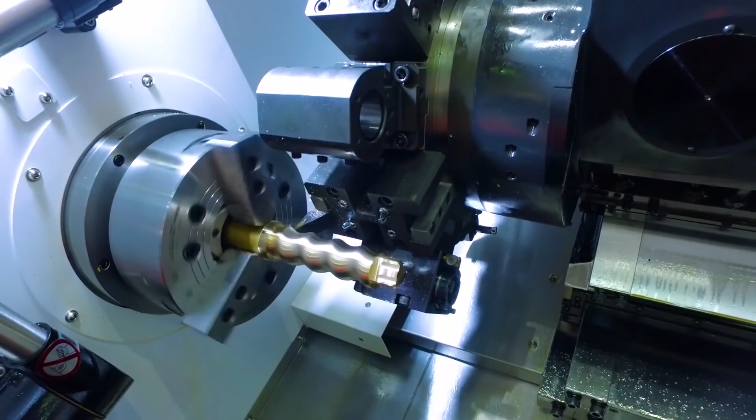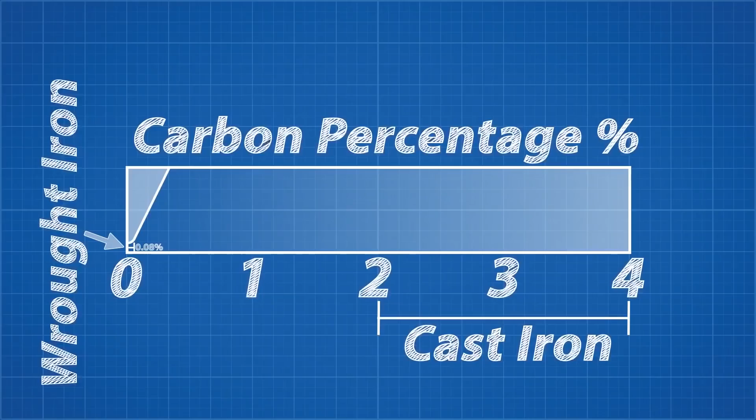We have spoken before about how the refining process of iron determines whether the resulting material will be iron or steel, and how the exact percentage of carbon present has dramatic results on the final material properties, and how production methods through time have taken steel from an expensive material reserved for swords, armour and toolmaking to one that is permeated into nearly every technology we use in our lives.

But I failed to tell you why that simple addition of carbon has such a huge effect on the iron, turning it from a relatively weak material to one capable of launching an industrial revolution, which is what we're going to learn today. Much of our knowledge in crafting steel was passed down over the centuries from blacksmith to blacksmith, creating tools for their communities.

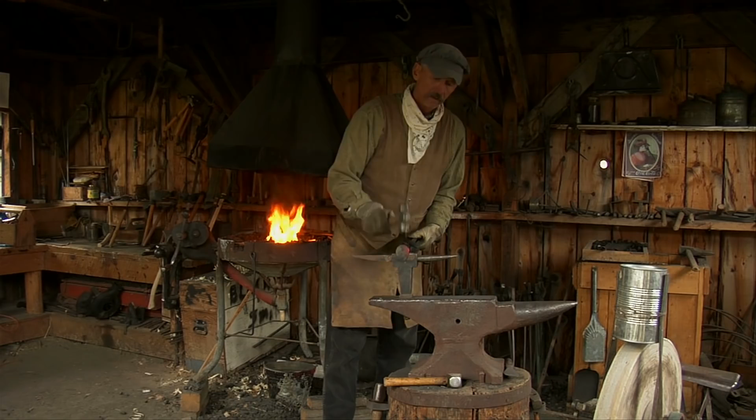So to learn more about this amazing material and how blacksmiths carefully tailor its material properties, I visited Alex Steele's workshop to create my own knife from scratch.

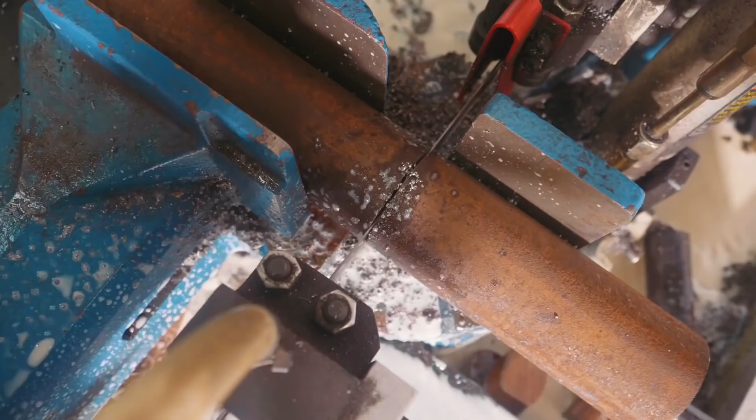We started our forging process with round stock 1055 steel with 0.55% carbon content, and placed it in the forge and gradually shaped it with a power hammer to a rectangular bar that could be more precisely shaped into the shape of our blade using a 3-pound hammer that my wee arms struggled to swing after an hour.

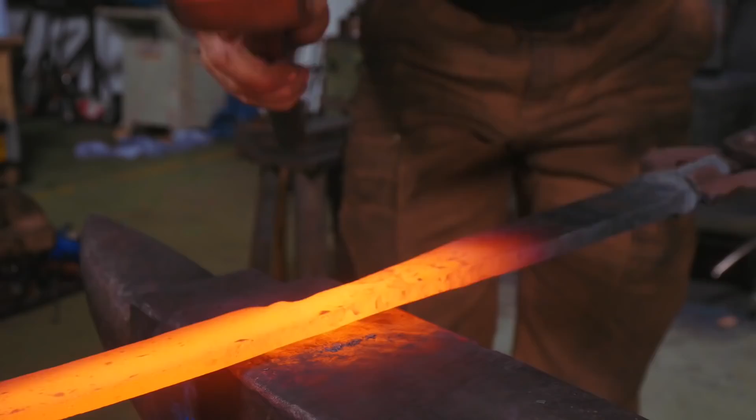Once we roughed out the shape, we began to grind and refine our blade, eventually producing our blade blank that would be later grinded to its final shape. But before that could happen, we needed to perform some metallurgy wizardry through the heat treatment process.

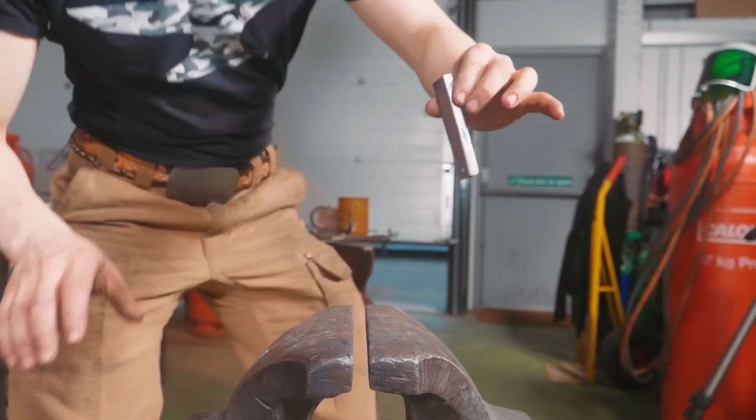To drive home how important this step is, we tested 4 samples of the same material at different stages of the heat treatment process. This was our sample before the heat treatment process, which you will quickly see was the weakest of the bunch. This is the normalized sample, which was ductile with a low yield stress. It took several hammer blows, which it absorbed through plastic deformation, not ideal characteristics for a sword or knife.

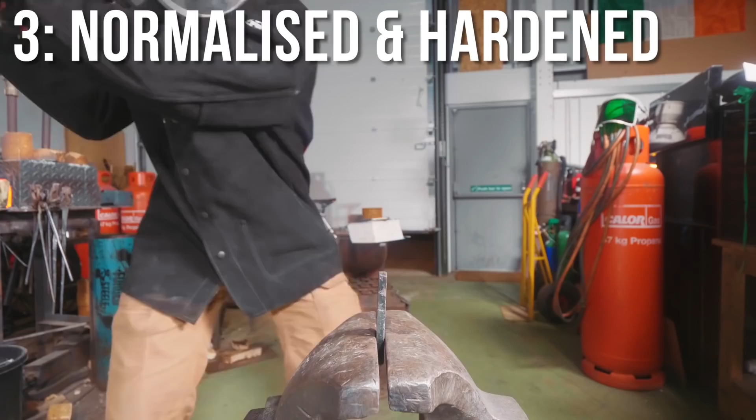Next we tested our quench hardened sample, which is stupid and dangerous and should not be tried at home. This fractured explosively and tore a hole through Alex's reflector.

Finally we tested the tempered material, which absorbed every hammer blow with minimal plastic deformation and only broke when we cut a notch into the material to create a stress concentration point. This material is tough, capable of absorbing energy without deforming permanently, and hard, allowing it to resist damage to the cutting edge. It is the ideal material for a blade.

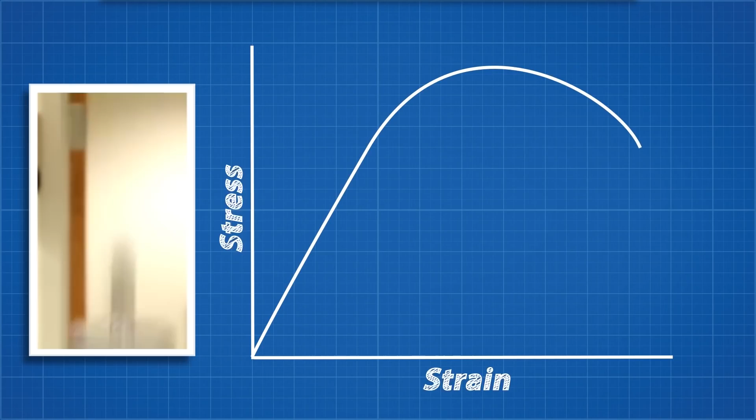So how can the same steel alloy change so radically by simply applying heat? Well, this is the magic of the iron-carbon alloy. We can carefully control how the internal metallic crystal structure forms with heating and cooling cycles.

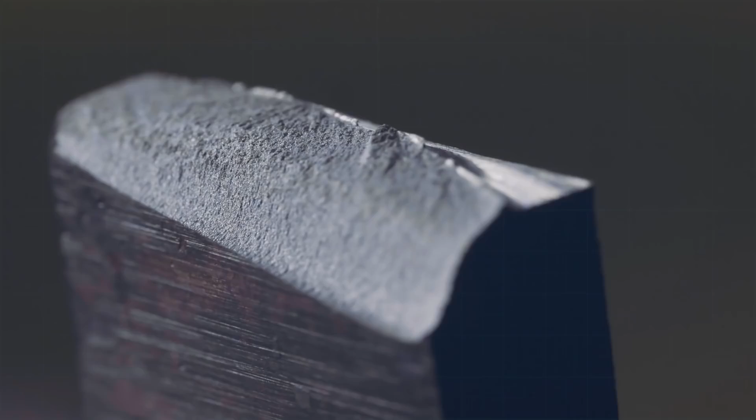First, let's see how adding carbon to the iron affects the crystalline structure. With no carbon present, pure iron forms a crystal structure called body-centered cubic with an iron atom at each of the 8 corners and another in the center.

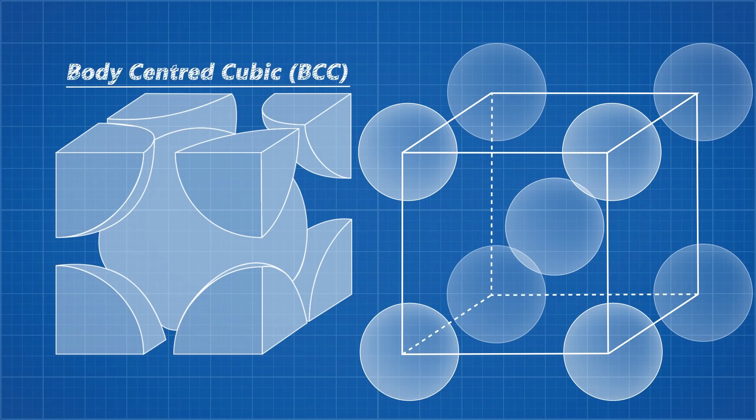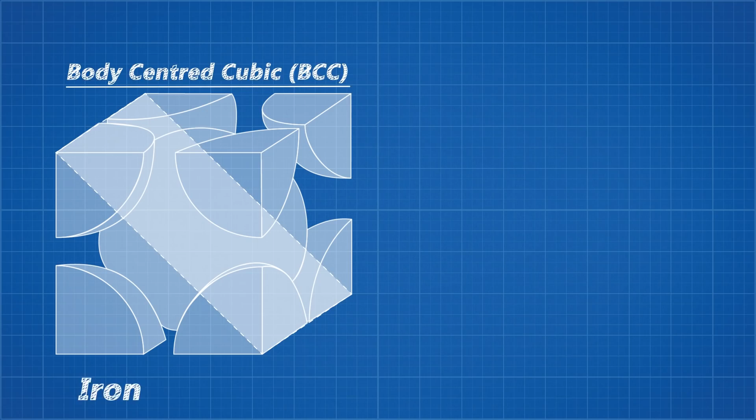Each crystal structure has a direction it most easily wants to deform, called a slip plane. For body-centered cubic, the slip plane occurs along this plane. Metals with body-centered cubic crystals like iron and tungsten tend to be harder and less malleable than metals with face-centered cubic crystals like aluminium, lead and gold.

When a metal is cooling, these crystals grow from individual nucleation points and form grains where each grain has the same orientation of slip plane, but neighbouring grains may not have the same slip plane. Let's think about this 2-dimensionally.

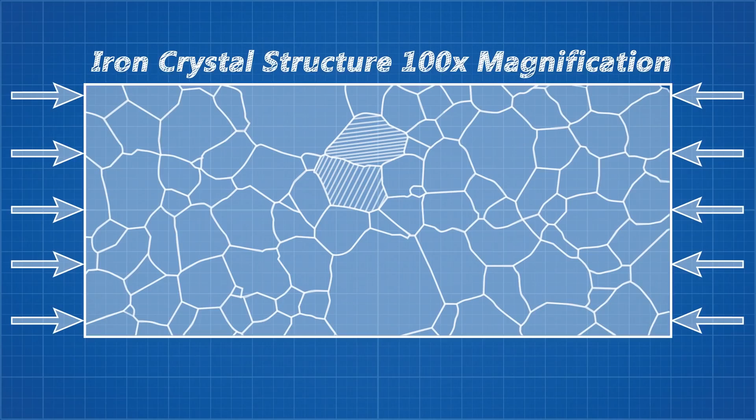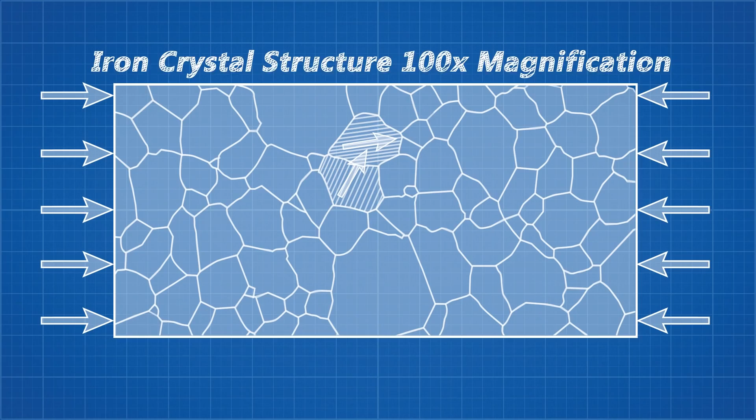When a force is applied, the grain wants to slip in a particular direction and passes the force onto the next grain in that direction too. But this grain's slip plane is at a different angle, so that force needs to be greater in order to cause deformation. It's like trying to push a train down a railway track by pushing on its side - it's not going to go anywhere easily. So smaller and more numerous grains results in a stronger material.

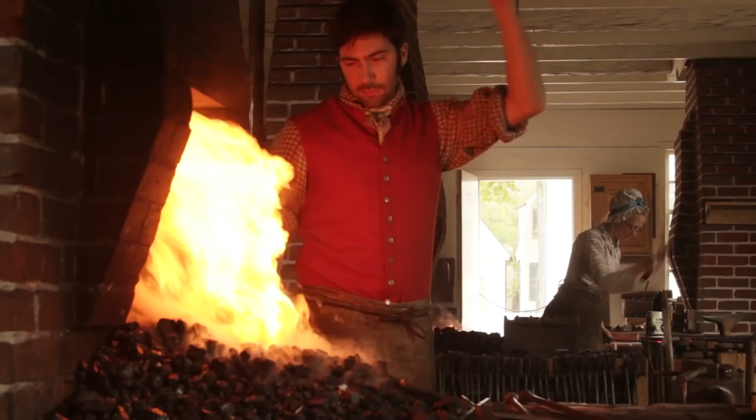Pure iron tends to always have the same crystal structure as it cools, and its crystal structure doesn't change meaningfully with heat treatment. This is where alloying with carbon comes in.

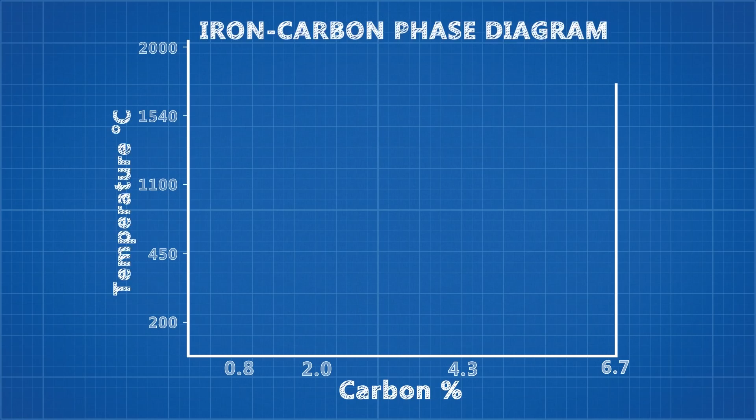To explore this, let's look at our phase diagram for carbon steel. On this diagram, we have our carbon content percentage on the x-axis and the temperature of the metal on the y-axis. This tells us the crystalline structure of the metal at various temperatures and carbon contents. On the left-hand side, we have pure iron, which forms only one crystal structure called ferrite. As we move across the diagram to the right-hand side, less and less of the crystal structure forms ferrite, and more forms an iron carbide alloy, commonly called cementite.

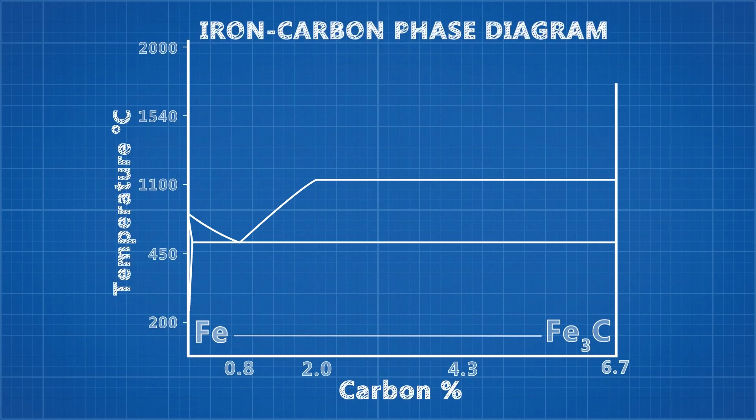Now if we move up in temperature, we start to see these lines that represent transitional temperatures, where the crystal structures of the steel begin to transform into a new crystal structure called austenite. Moving further up again, we see these lines representing the transition of the material to a liquid state.

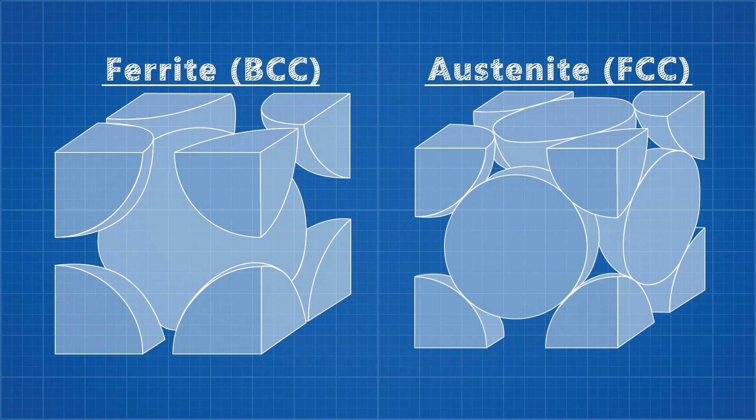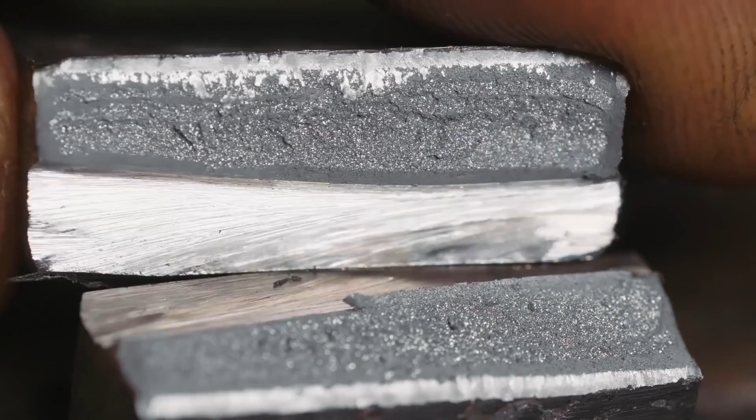Austenite's primary difference to ferrite is that it forms that face-centered cubic crystal structure that we saw earlier, while ferrite is body-centered cubic. And while this packing pattern is denser than body-centered cubic, it does open up spaces in the crystal structure that interstitial carbon atoms, which are smaller than iron, can snugly fit, allowing austenite to have a higher solubility to carbon over ferrite.

Using all this information, let's take our 1055 steel with 0.55% carbon content and see how it transforms from the start of our heat treatment cycle to the end.

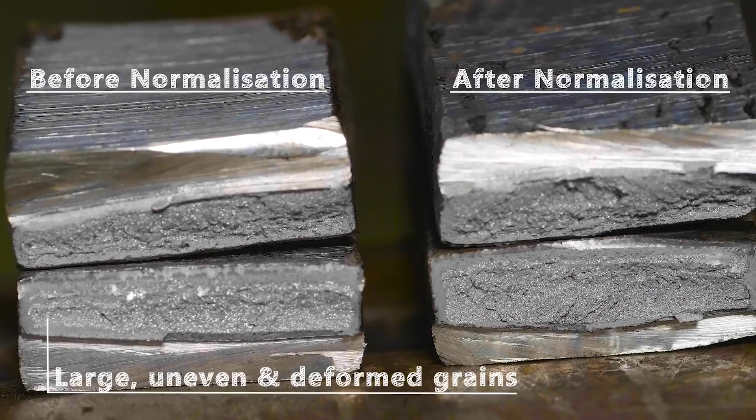The first step is called normalization. Normalization's primary function is to relieve internal stresses and strains that form during the forging process and return the material to its original crystal structure before forging began. It's effectively a reset button for the steel and creates a nice even grain size and distribution, increasing its strength.

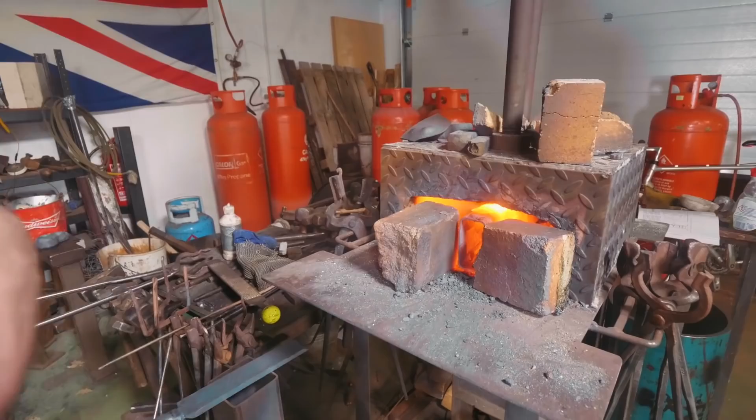Here we place the knife inside a steel tube to prevent the metal from receiving heat directly from the flame, but instead a more even radiative heat from the tube. Once it reaches this transition temperature, we let it soak to give the crystal structure time to settle. The next step in normalization is to allow the steel to slowly air cool.

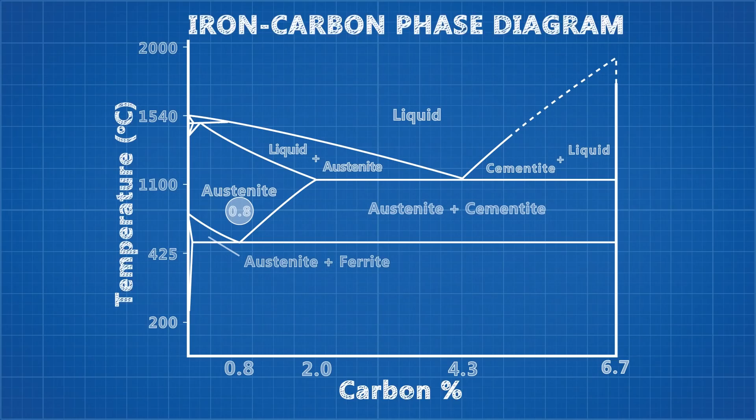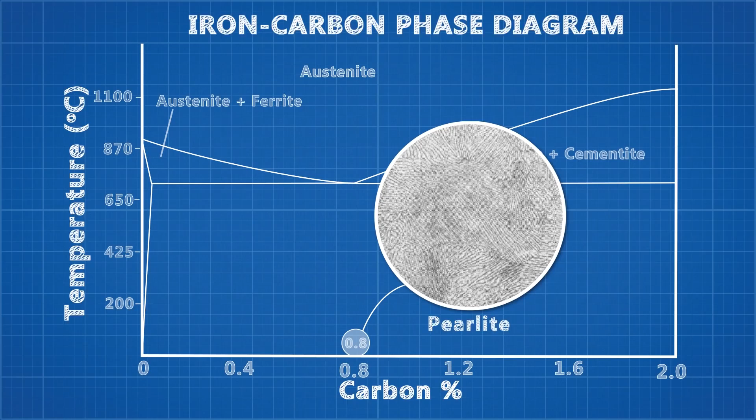What happens now depends on the carbon content. If we take a 0.8% carbon steel - no, hang on, we're definitely going to need a bigger graph for this. Okay, if we take a 0.8% carbon steel and cool it through the transitional temperature, the austenite and the interstitial carbon will slowly transform to a mixture of ferrite and cementite, which takes this lamellar structure called pearlite. Pearlite only forms at a 0.8% carbon solution.

Now if we take a 0.2% steel and slowly cool it to its first transitional temperature here, where ferrite first begins to form - ferrite is pure iron, so as it forms the carbon percentage begins to rise. This will continue to happen until the remaining austenite has a carbon percentage of 0.8% and will then form pearlite from this point on. This forms a crystal structure dominated by ferrite, showing here as a lighter colour, surrounded by the darker pearlite.

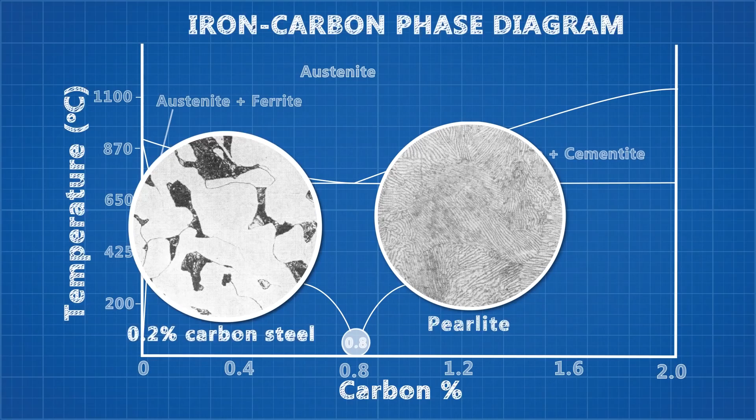Comparing these microstructures to another two, we can see the effect carbon has on the microstructure. Here we have pure iron with 100% ferrite, showing us the light colour. You can even see the grain boundaries. This is 0.5% carbon steel, similar to ours, where a very small amount of ferrite formed before reaching the point of pearlite formation, and this is 0.8% carbon steel, where the entire structure is pearlite, with our previous example showing pearlite under 500 times magnification, where you can readily see that lamellar structure.

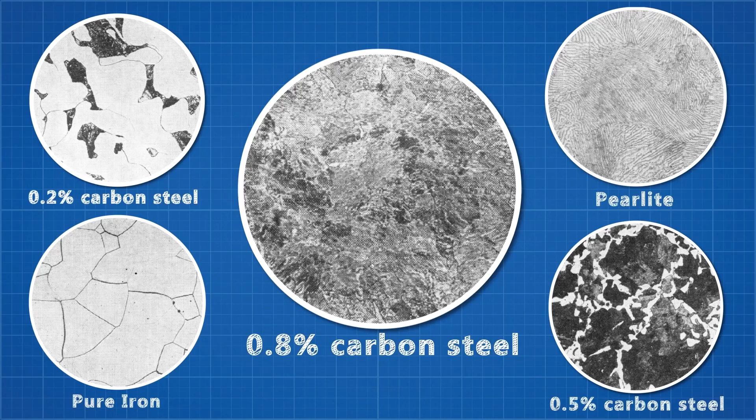How pearlite strengthens steel is not well understood. It has little effect on the steel's stiffness, but increasing the pearlite content has a dramatic effect on the material's yield point, making it much more capable of absorbing energy without permanently deforming.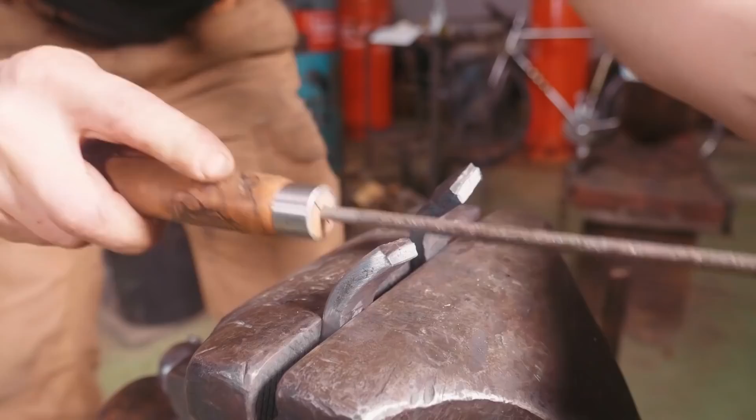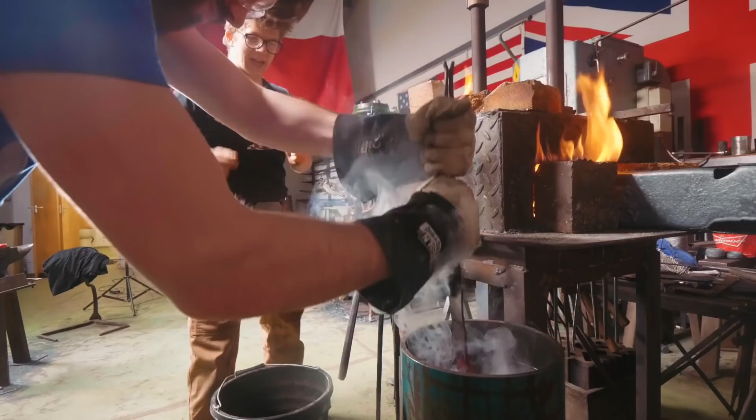But we can increase the material's stiffness and hardness with our next step. If we heat the metal back up to form austenite once again, but this time instead of letting it cool slowly, we rapidly cool it in oil, the carbon atoms that spread out throughout the hot austenite structure cannot diffuse out of the crystal lattice to form cementite, and instead get stuck in solution, creating a new crystal structure called martensite.

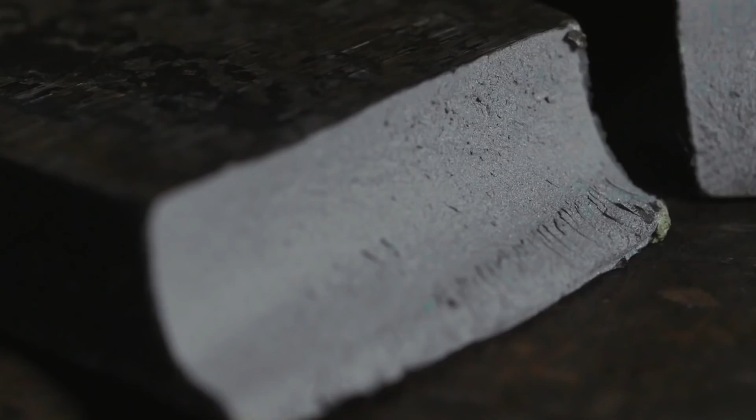This crystal structure has a huge amount of internal strain, in part because the carbon trapped within the crystal structure causes the crystal lattice to deform, but also because during the rapid cooling, the surface cooled much faster than the internal material. This causes internal tension in the material.

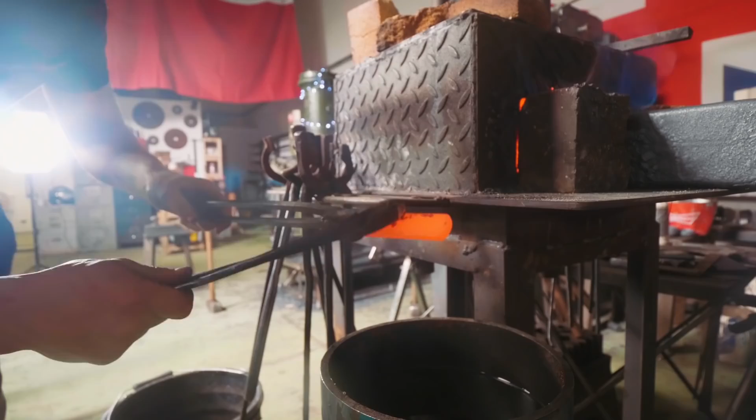These internal strains make it harder for additional deformation to occur, but this does not make the material tougher. It simply means that it will not stretch and bend before breaking. And when it finally does fracture, all of this internal tension is suddenly released in an explosive expansion.

If you've watched Smarter Every Day's video on the Prince Rupert's drop, you'll have seen this principle demonstrated in incredible slow motion.

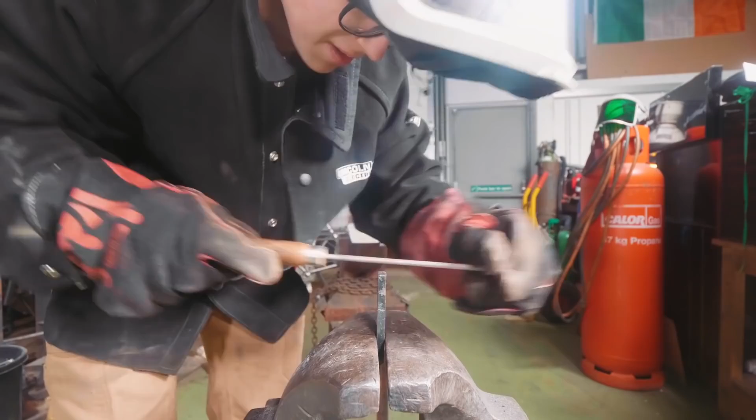This material property is called hardness, and we want our cutting edge to be hard to resist damage when cutting. But we do not want our entire blade to be hard, as it will not be able to absorb a lot of energy. It needs to be able to dissipate some of that energy through heat and deformation.

This is where the final step of the process comes in, called tempering. Tempering raises the temperature enough to allow the carbon trapped in solution to escape. We just use an oven set at 200 degrees.

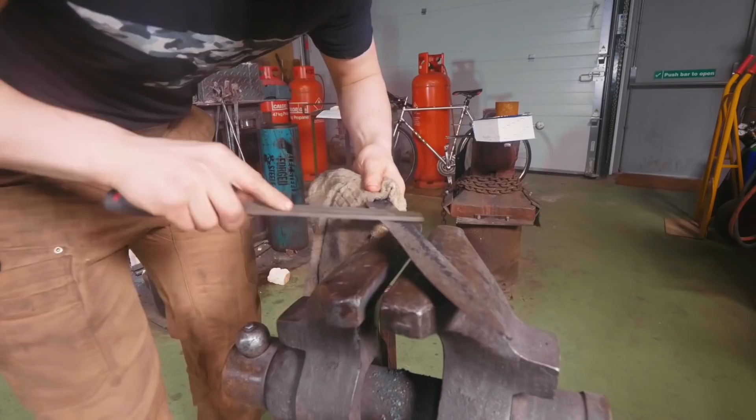The carbon then coalesces to form cementite once again, but instead of forming pearlite like before, it gathers in globules surrounded by ferrite. Tempering also relieves some of that internal tension caused by the rapid cooling. This reduces the hardness but increases toughness.

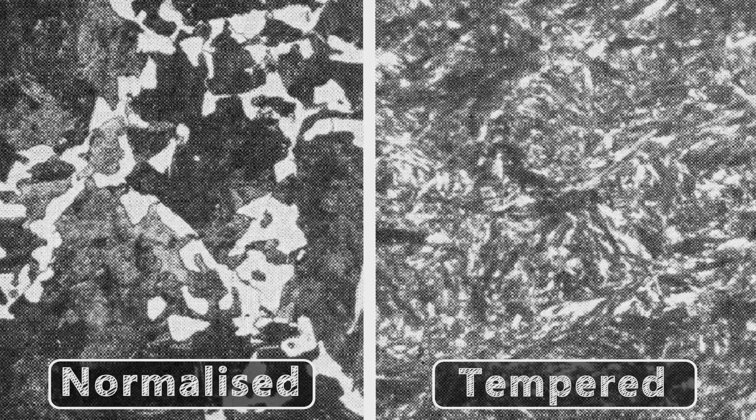This produces a material that has the perfect balance of characteristics between the normalized material and the hardened material. It is ductile enough to absorb hammer blows without shattering, but strong enough to not permanently deform, and with enough hardness to ensure it doesn't gather damage on the cutting edge.

This process gave our steel the perfect material properties, and a lot of that is thanks to the quality of the steel we started off with.